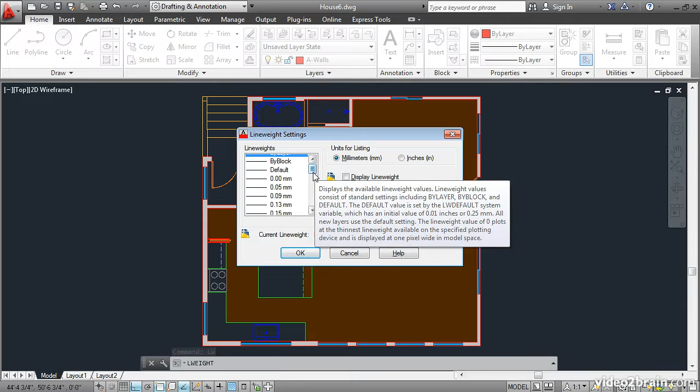Type LW, this is the command alias for the LWEIGHT command, and press Enter. Here you see a list of line weights, and they're all given in millimeters. And this is the case even if you're using feet and inches. I think the reason for this is that everyone has an intuition about technical pencils. The most commonly used technical pencils are 0.5 millimeters. You can also find them as 0.7 millimeters, and if you go to a drafting store, you can find them in all different sizes, but probably not as many as AutoCAD lists here.

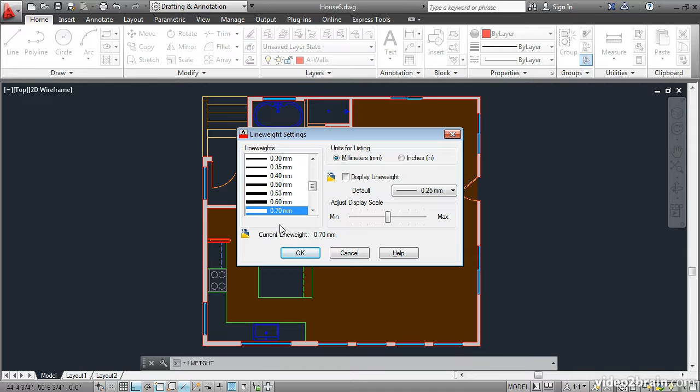Now if I go ahead and select a thick line weight like 0.7 millimeters and click OK, notice what happens up here on the Properties panel. It's selected that in this Properties drop-down. If I draw a line, it looks the same as all the other lines on screen. I'll zoom in closer. It's represented by a single pixel width.

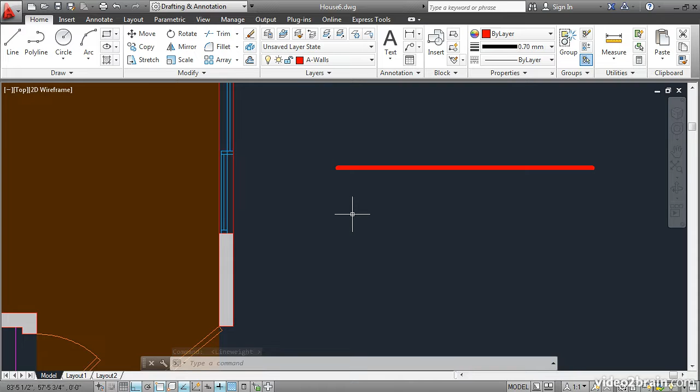Go down here to the status bar and toggle Show/Hide Lineweight. There we go. Now we can see an approximation of what this line would look like when it was printed on paper. If I zoom out, you'll see that that line appears to get thicker as I keep going out. Well, actually it isn't. It's maintaining the exact same thickness no matter which magnification I'm in. You see, if I zoom in, it's the same thickness no matter what. So its effective thickness changes depending on magnification.

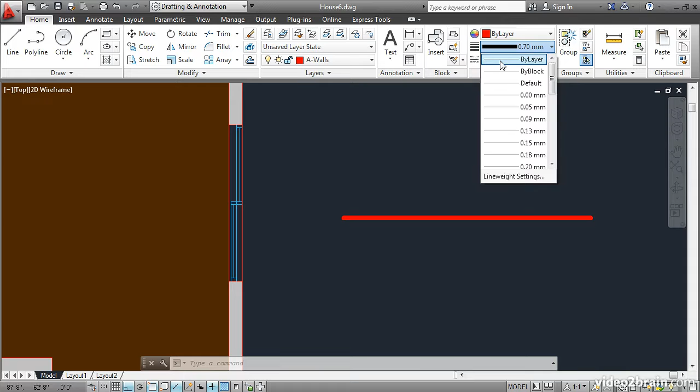So this line weight toggle isn't really meant to be an honest representation of line weight. It's really just meant to give you an idea of the relative thickness of lines. So I'm going to go up here and change this back to ByLayer. It's generally not a good idea to draw objects with specific properties that are overridden. Instead, the best practice is to assign line weights to layers.

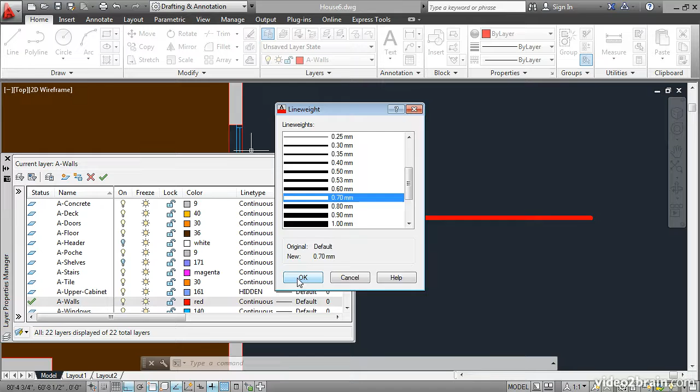So let's go to the Layer Manager and change the A-Walls layer to have a different line weight here. I'll click on Default and I'll select 0.7 millimeters. Okay. Now all the walls in the drawing appear with this line weight. Now this is going to be hard to work in a drawing like this because it's so thick. We can do a couple of things.

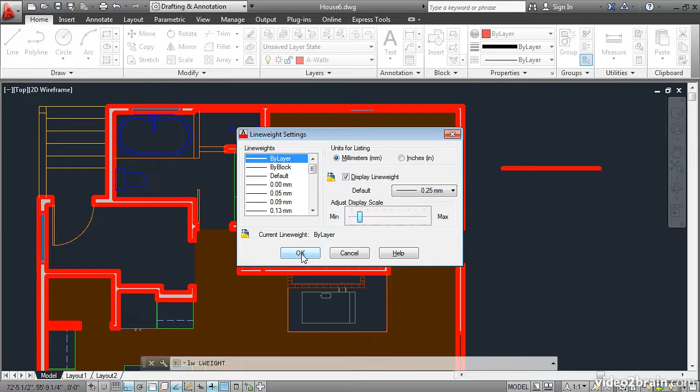We can go back to line weight by typing LW Enter, and we can adjust the display scale by toning this down a bit. Okay, now it's not so overpowering, and I might actually be able to work in a drawing like this. But the lines don't really appear that crisp, the corners seem rounded off, and so this is really, again, just meant to be a visual reminder of your line weights. But when you're actually drawing, I recommend keeping this toggle off.

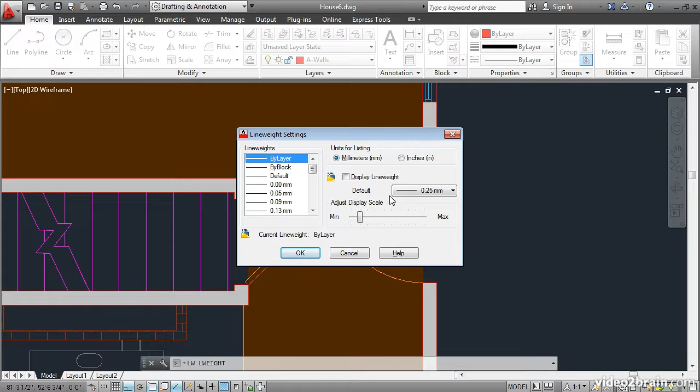Let's go back to the LW command and adjust the default line weight, which is set right here. I'll open this up, and let's say the default lines are going to be just a bit thicker at 0.35 millimeters. Okay. I have to keep that in mind, because when I go into the Layer Properties Manager, I have to mentally remember that the default line weight of all of these layers is 0.35 millimeters. So if I want to make a line that's thinner, I have to just keep track of that.

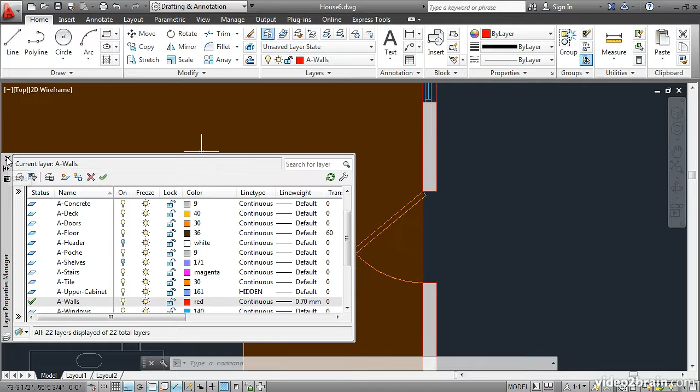So a lot of thought usually goes into a layer standard so that the layers are all mapped out to different line weights and line types. But this is something that you can evolve over time, or you can use a layer standard in an office where you might work, where this has already been figured out for you.

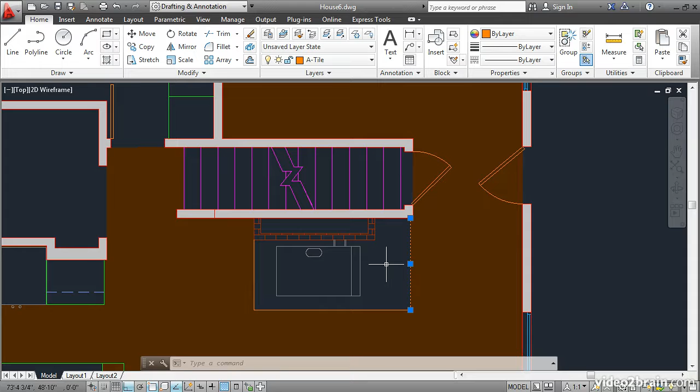Now let's decide on a couple of line weights for different layers. Click right here, and you'll see that this layer is A-Tile. So this is just a floor transition. It really should be a very thin line, because it really doesn't represent anything that's poking up out of the floor plane. It's just a transition. So let's make that very thin. A-Tile will be thin.

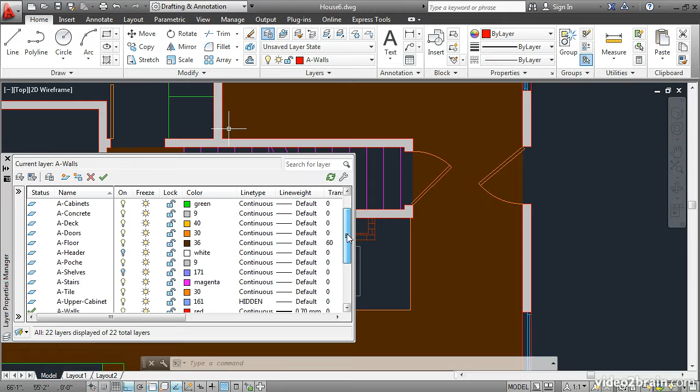And then Escape. I'll click here, and this is the A-Brick layer. Okay, that would be thicker, wouldn't it? A heavy brick wall should be bolder on the plan. So let's go back to the Layer Manager and change these two layers. A-Brick will have a thicker line weight, perhaps as thick as the walls. I'll make it 0.7. And the A-Tile layer will be very thin. I'll set it at 0.2 millimeters.

So again, let's turn on line weight to see what that looks like on screen. We get a visual preview of what the lines are relative to each other, but you really have to see how the line weight looks on paper to get the full effect. In this video, you have learned how to use the LWEIGHT command to assign the default line weight to the drawing, and also how to assign specific line weights to layers and objects.